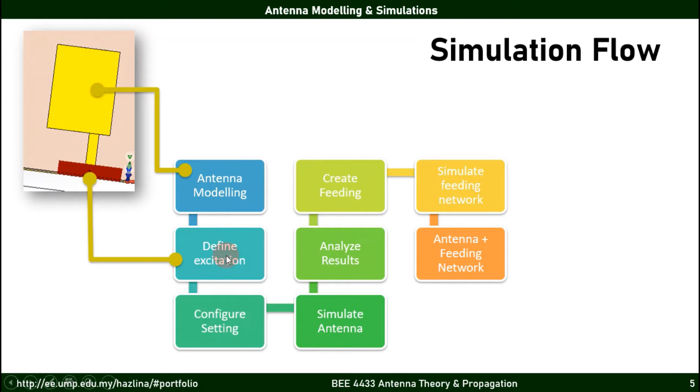In this session, we will look into a rectangular patch antenna design, modeling and simulation, in which we will model the antenna. We will define an excitation port, and later we are going to configure the simulation setup before simulating and analyzing the results.

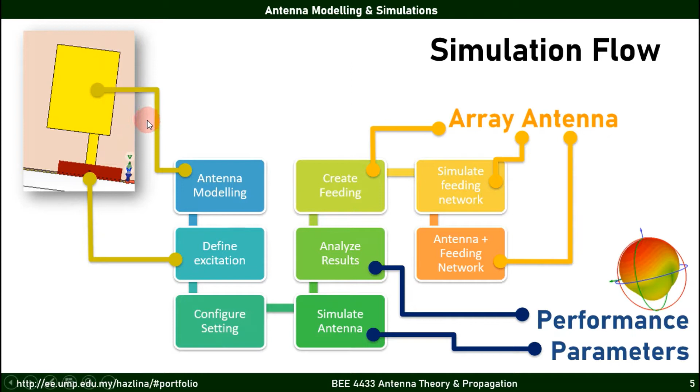The simulated performance parameters should meet the design requirements set earlier. Note that we are not going to create or simulate the feeding network together with the antenna, as this session will only involve single antenna element design.

Let's review the structure of a microstrip antenna that has been shown in the previous video, resonant antenna. So in general, a microstrip antenna should consist of a ground plane and also a radiating patch together with a substrate. In this case, both the ground plane and the radiating patch are made of copper, whereas the substrate is made of Taconic material.

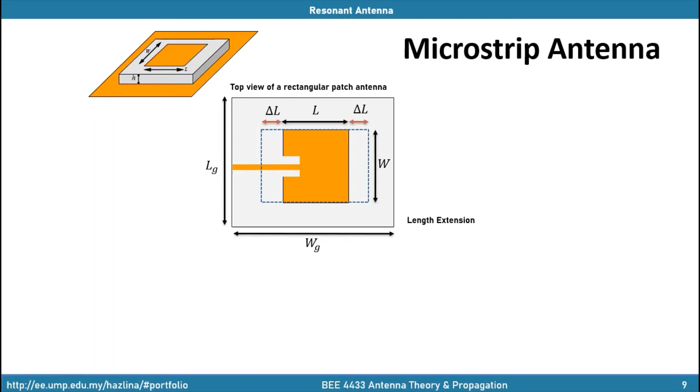Let's begin with our CST modeling and simulation. Start with a new template. Select Microwaves and RF/Optical. Choose Antenna. Next, Planar. Next, Time Domain solver. Next, make sure the units declared here are correct: millimeter for dimension, gigahertz for frequency, and nanosecond for time.

Next, we're going to design this antenna to operate at 3.4 GHz and monitor its performance at 3.4 GHz. So let's set our minimum frequency around 3 GHz and maximum frequency around 3.8 GHz. And let's monitor the E field, H field, and far field. Note that there are 3 monitoring points here, which are 3 GHz, 3.4 GHz, and 3.8 GHz. For each targeted frequency, the E field, H field, and far field will be simulated.

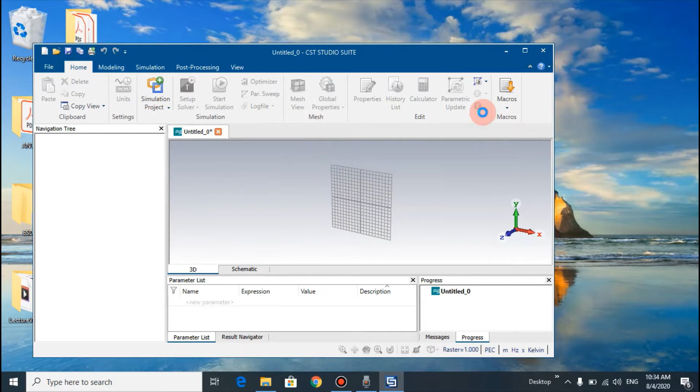Select Next. If you're okay with this template name, antenna planar, click Finish. You can also rename this. Once done, it will bring you to this window. Let's maximize this. On the left corner is the menu. In the center here is where you will model your antenna. The Progress tab will be shown here.

And there are schematic and 3-dimensional points of view of this antenna. In this case, we are going to do this in 3-dimensional. So there are a number of ribbons here. From Home, you can set up the simulation, the choice of solver, modeling, simulation, post-processing, where you can analyze the results after the simulation, and also the viewing options.

Let's begin by declaring the materials that will be used in this antenna design, which are 2 items. For the radiating patch and for the ground it will be copper, and for the substrate it will be Taconic RF-35, which has a permittivity of 3.5. To do so, we can load this material from the library. CST has a number of materials that are available.

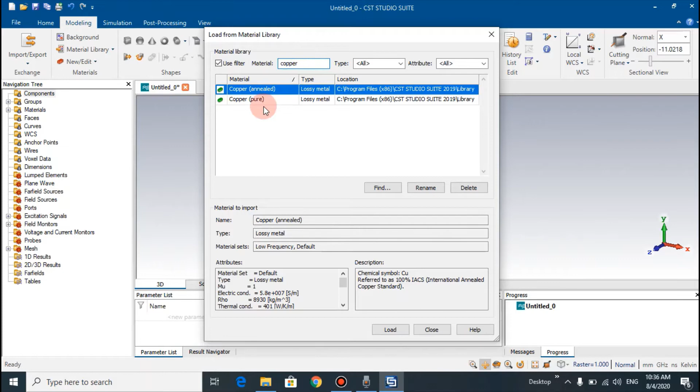So let's begin with copper. There are 2 types of copper. In this case, we are going to use copper annealed. Load. We'll repeat the same for the substrate, which will be a Taconic material. Taconic RF35 lossy. Click Load. You can double check this under this material folder. Taconic and copper are currently added, together with the PEC and vacuum, which are available by default.

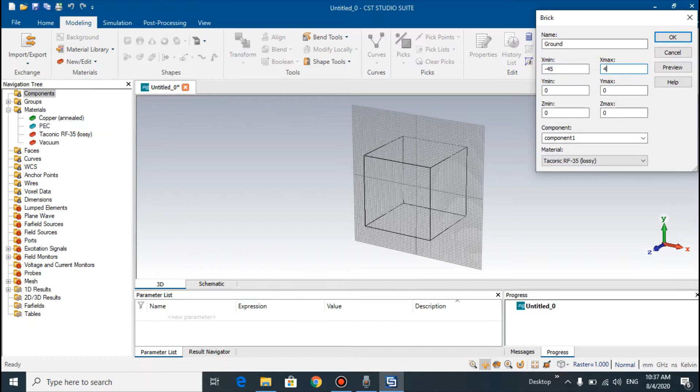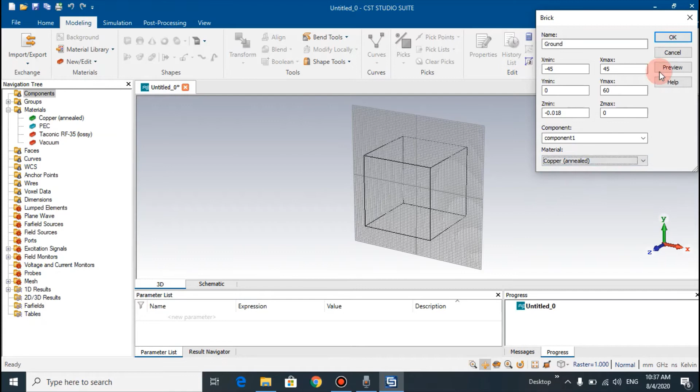Once this is done, we are going to start with the ground plane. Select Brick. Click Escape. Let's rename this as ground with the following dimensions: negative 45, 45, 0, 60, negative 0.018, Z maximum as 0, and the material should be copper. Let's preview it. This looks okay. Click OK.

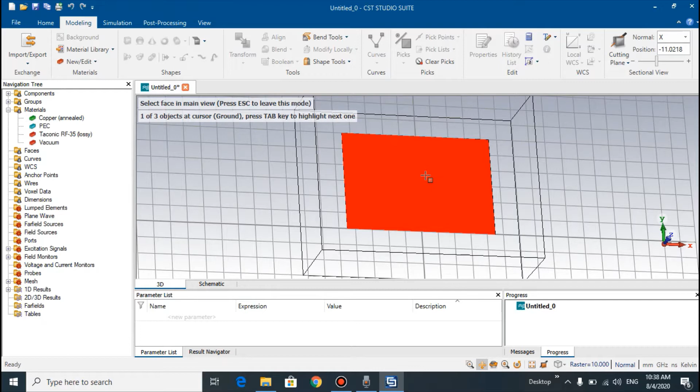Next, we'll proceed with the substrate layer. So in this case, I'm going to click F on my keyboard. It will automatically choose the pick face function. In this case, I'll use the surface of this ground. Double click and extrude. I'm going to rename this as substrate.

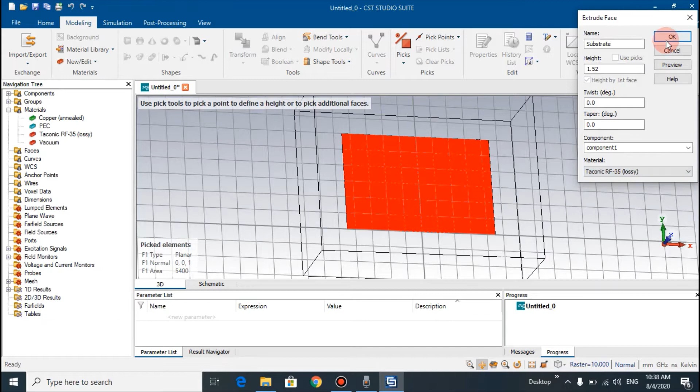Height will be 1.52. And the material will now be Taconic RF35, the substrate material. You can preview this and it seems okay. I'm going to click OK. So now I have two structures here, the ground as well as the substrate. So the next phase is to proceed with the feed as well as the patch design.

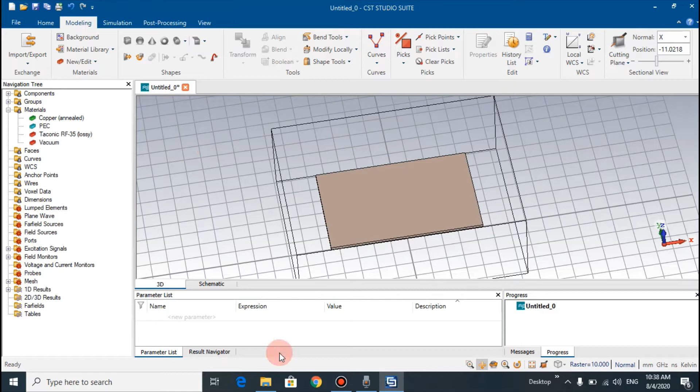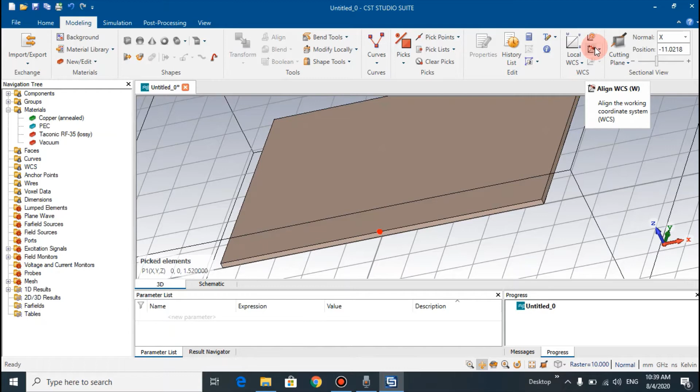To design the feed, first I'm going to choose the middle segment of this edge. I'm going to press M on my keyboard and select the middle point of this edge. I'm going to shift my WCS coordinate system to this point.

Once done, I'm going to choose Brick, Escape, and rename this as feed with the following dimensions: negative 15.2, negative 11.8, V minimum as 0, V maximum as 16.5, W minimum as 0, W maximum as 0.018. The material now should be copper. I'm going to preview this design and it should be there. So I'm going to click OK.

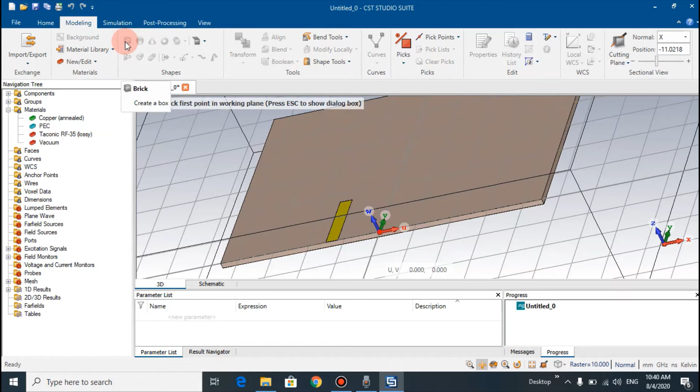So the next phase is to create a patch. So I'm going to choose Brick, Escape, and rename this as patch. U minimum as negative 30.1, maximum as negative 8, V minimum is 16.5, V maximum as 49.5, W minimum 0, W maximum as 0.018.

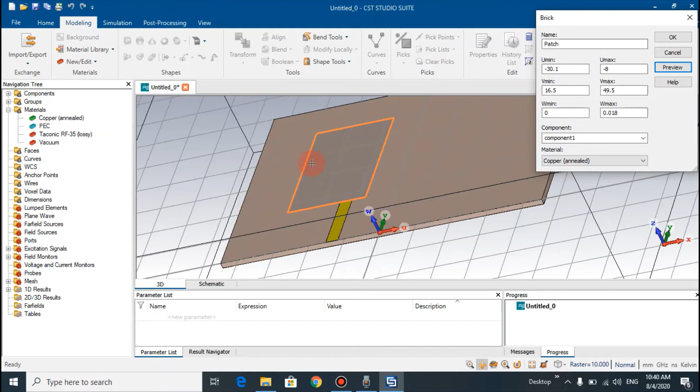Material is the same, copper. So let's preview this. Yes, this should be in this position. So I'm going to click OK. So now I've completed my design with a patch, a feed structure, substrate, and also ground.

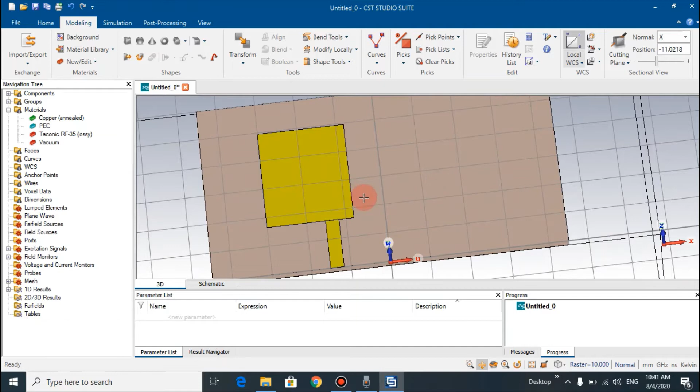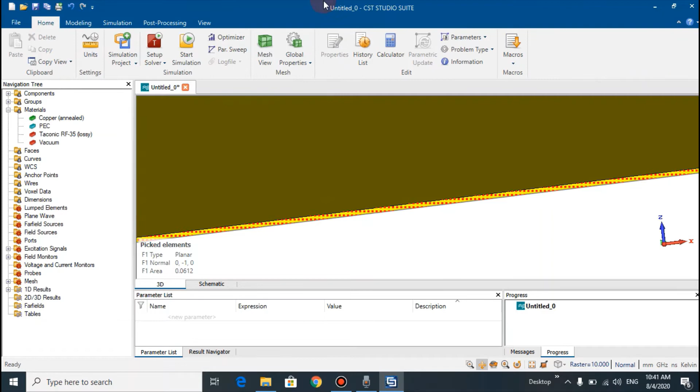The second stage is now to declare the excitation port. To do so, I'm going to zoom into the feed structure and choose the surface of this feed structure, in which I'm going to click F on my keyboard and select this face. Then we will choose the available macros, which in this case is the solver macro, ports, calculate port extension coefficient.

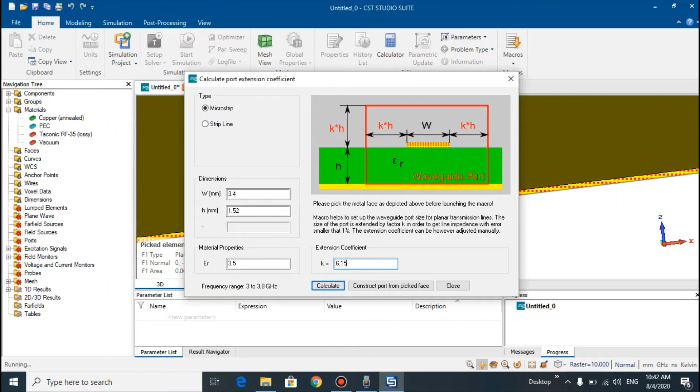So let's double check this one. The width of the feed is 3.4, height is 1.52, and the permittivity that was declared earlier with our substrate material Taconic is 3.5. These are correct. And the suggested K would be 6.15. Once this is confirmed, click Construct Port from Picked Face.

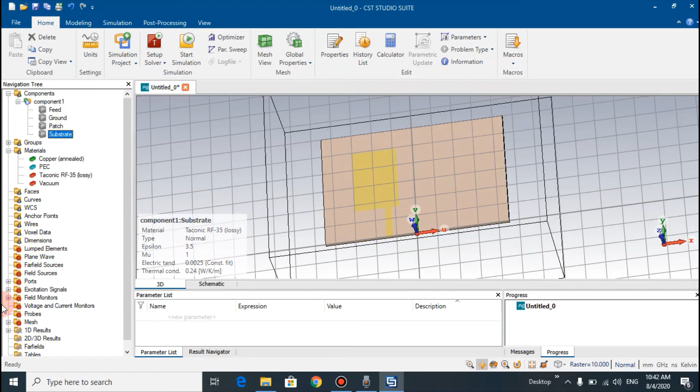Close. So now we have completed this antenna modeling, from the components, which are the feed, ground, patch and substrate, as well as the ports. You have here one port. Now this is done. Next is to choose or to set up the solver.

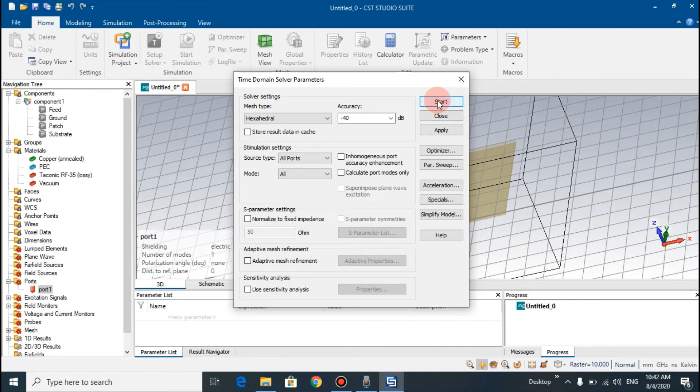There are a number of solvers available in CST MWS. For this case, I'm going to choose the time domain solver. Double click here, you will see these settings. For this simulation, negative 40 decibel accuracy is acceptable. Then I'm going to click start. Note here the progress of the simulation is shown in this window. 50% in progress with the simulation.

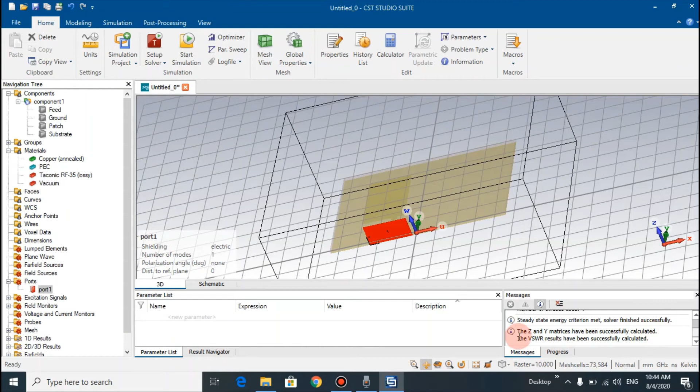Now the simulation has been completed. You click through these messages. You can see that the Z and Y matrices have been successfully calculated, as well as the VSWR. A number of other parameter calculations are shown here as well. So once this is done, let's go check its impedance.

Go to port modes and choose port 1, look at the e1. As you can see here, the mode type is quasi TEM and the line impedance is 48.8, which is near our targeted 50 ohm impedance. So this result is acceptable.

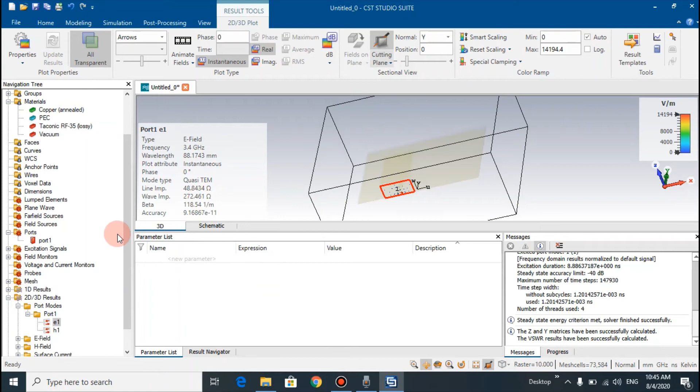The next phase is to review and analyze our one-dimensional results. We will start with port signals. As you can see here, the red simulation is for the input, whereas the green is for the output. The signals of output and input are oscillating and slowly decaying to zero, which means that by this time the antenna is resonant, is operating.

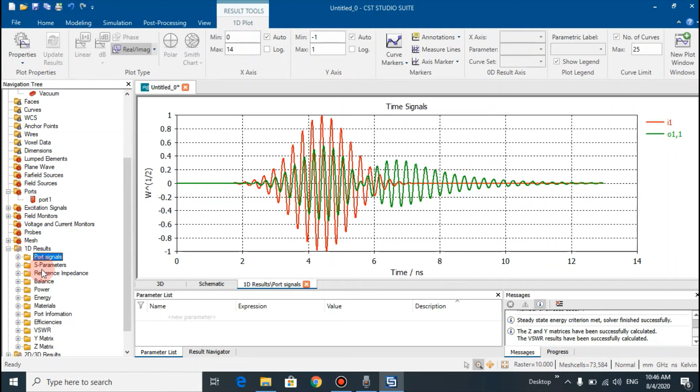Secondly, let's have a look at the S parameter. The targeted frequency for this antenna to operate is 3.4 GHz. So at this point, let's choose axis marker. At 3.4 GHz, the S parameter is -19, and the cutoff acceptable S parameter for antenna simulation is -10. So we can say that at 3.4 GHz, the antenna is operating and resonating.

We can calculate the bandwidth of this antenna by determining the lower bound frequency at -10 dB, which is more or less around 3.35 GHz, and the upper bound frequency is around 3.43 GHz.

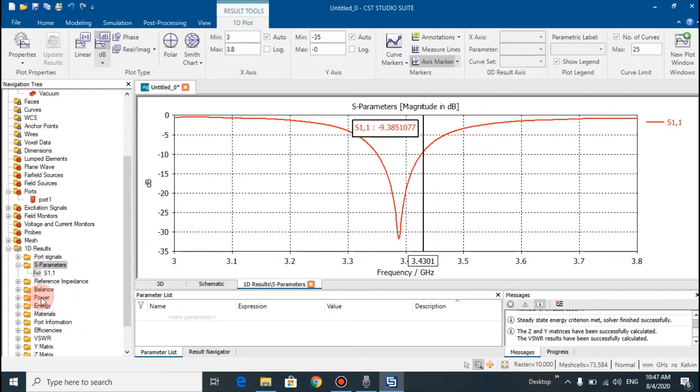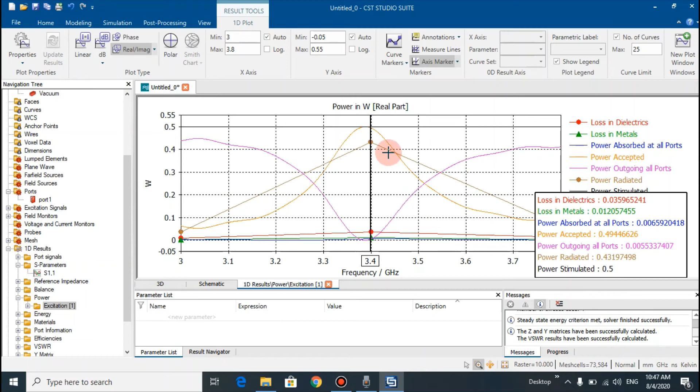Next is to review the power of this antenna at excitation port 1; there is only one excitation port available here. Let's move this marker to 3.4 GHz, which is more or less around this point. Let me shift here. As you can see here, at 3.4 GHz, most of the power is being radiated.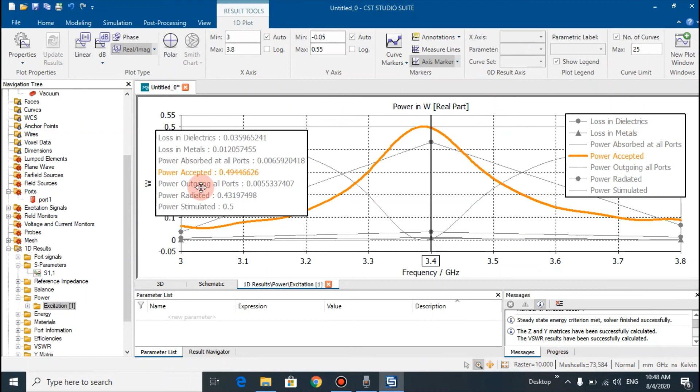The power accepted point. Power accepted is at nearly its highest point at 3.4 GHz. And at this point, the losses in metals and dielectrics are very minimal. The loss in metal is around 0.012 watt, whereas the loss due to dielectric is also significantly small, 0.03 watt.

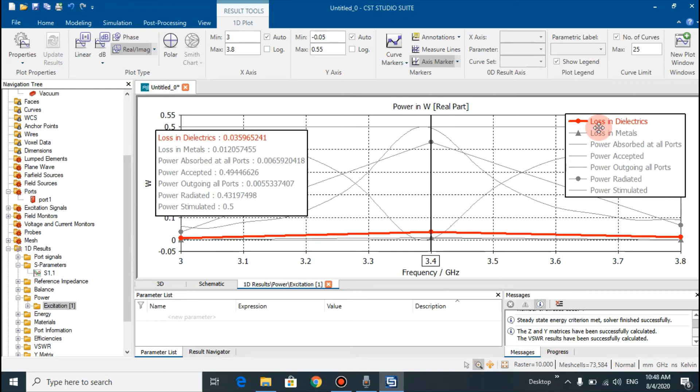Hence, this shows that the accepted power is radiated away from the patch antenna. Only a small portion is lost in terms of dielectric loss as well as metal loss.

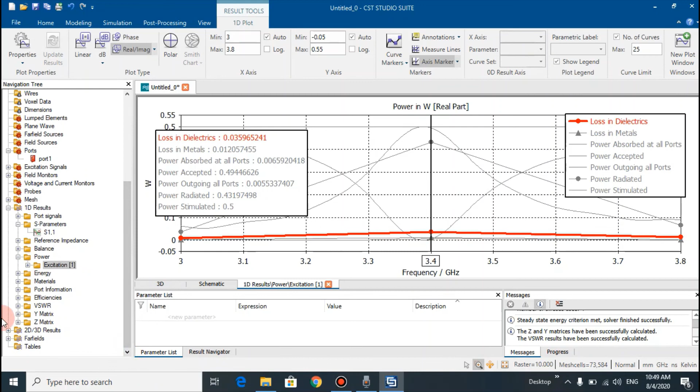Next is to have a look at the two-dimensional results. We will start with the E field. Let's monitor its E field. Let's choose 3.4 GHz. Choose contour here and choose smart scaling. What we can do here is animate this, and as you can see here, the electric field that is being radiated by this antenna.

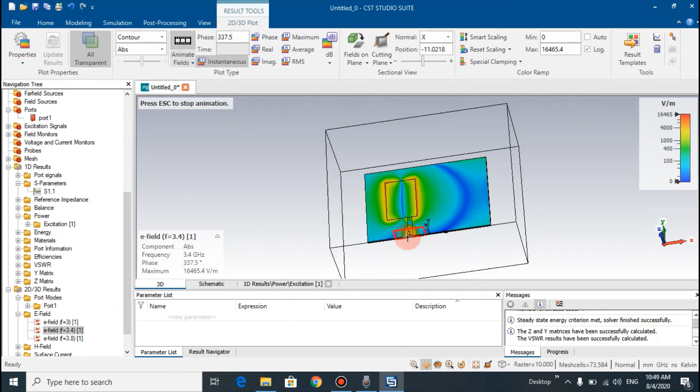You can also do the same and evaluate the H field, which is perpendicular to the E field just now. And we can also monitor the surface current. In this case, as you can see here, the surface current happens at the edge, which causes the phenomenon of fringing effect, which leads to the tips of designing microstrip antennas. The ground plane must be wider than the patch design to counter this fringing effect.

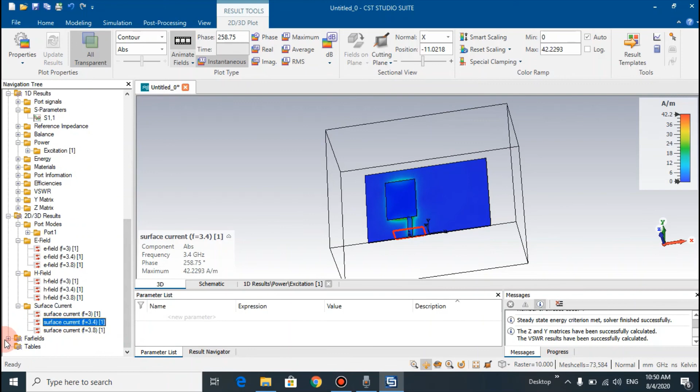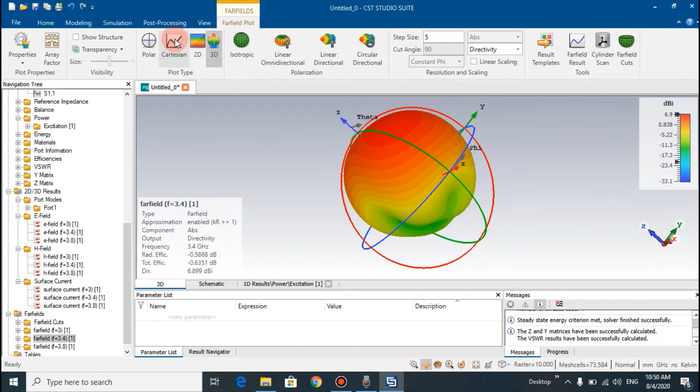Next is to evaluate the far field results. In this case, let's have a look at its far field simulation results at 3.4 GHz. We can see here this antenna has a unidirectional radiation profile pointing at the z-axis, zenith. We can evaluate this in terms of a two-dimensional plot, theta versus phi, as well as a polar plot. You can see here the unidirectional radiation profile.